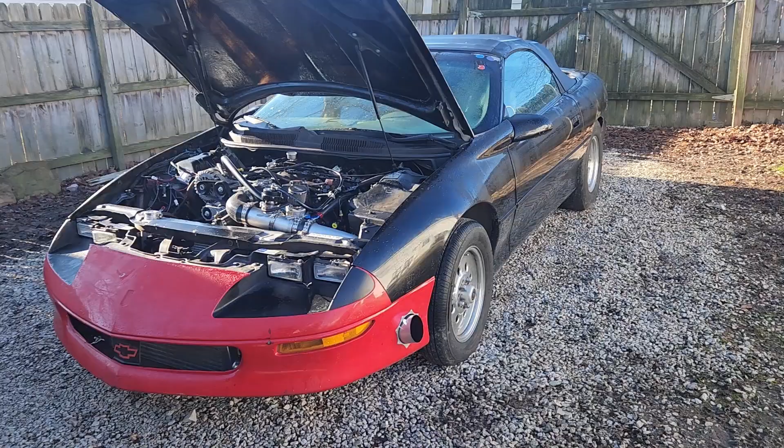But yeah. So the first step is we're going to get it up to temperature and see where the IAC steps are at. We want them between 40 and 60 at warm idle.

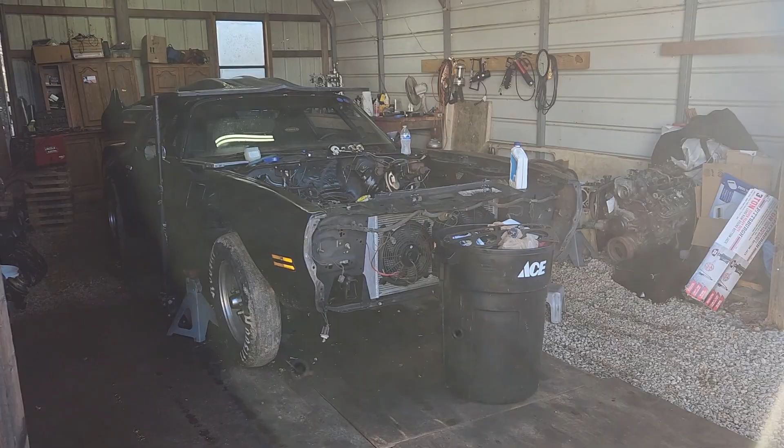Chris makes fun of me because his carbureted car, it starts way easier. That thing starts right up no matter what. At E85, it don't care how cold it is outside. It starts right up. Well, not now, motor's out of it.

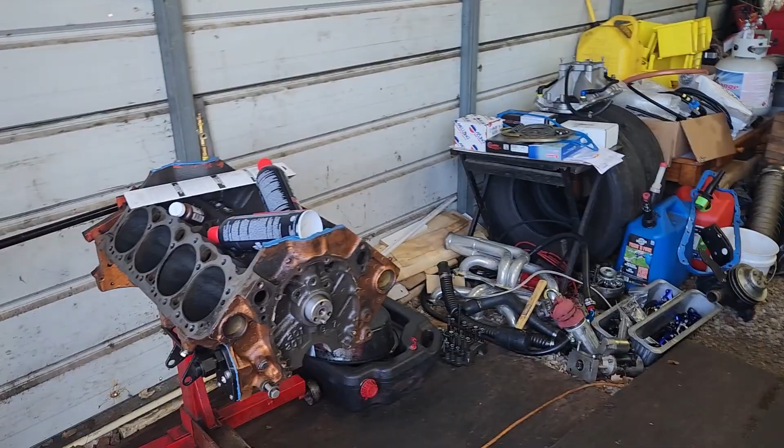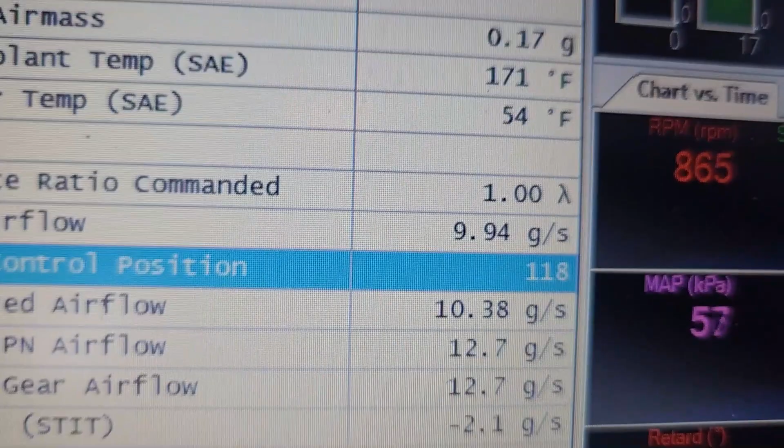All right, again, 160 thermostat. It's about as high as this thing gets. And look, we're at an idle air control position way too high. We should be 40 to 60.

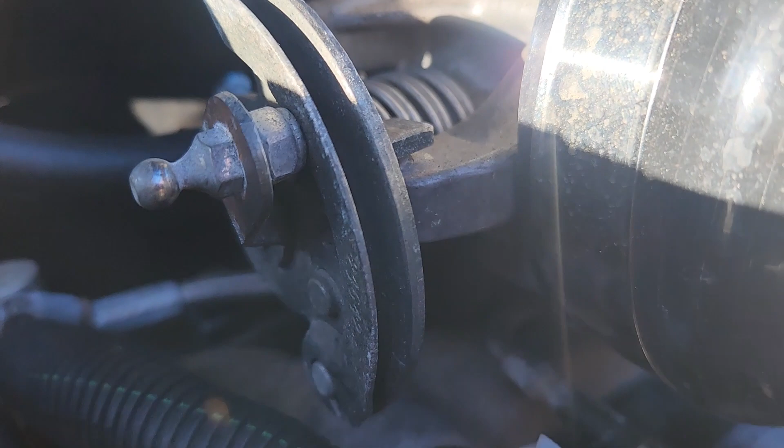What we're gonna do is, this is a T15. You have to screw it from the bottom. It's hard to get in there. So we're gonna screw that up, which is gonna open the blades up. And then we're going to reset the throttle position sensor. And then we've got to make sure that the throttle position sensor is reading less than 0.6 volts, I believe. But let's try to screw that in some.

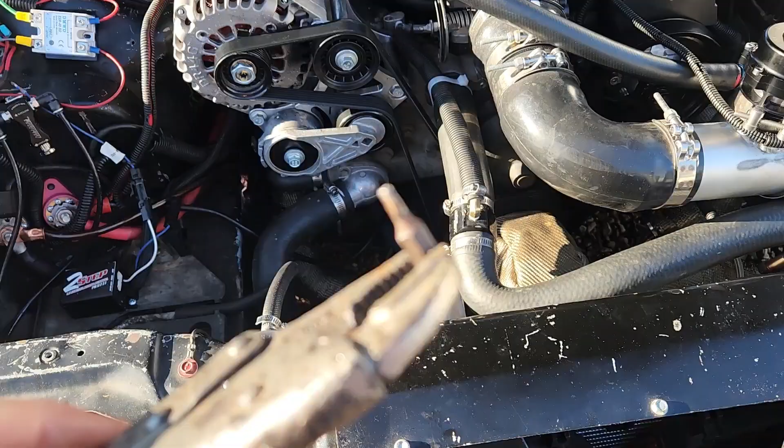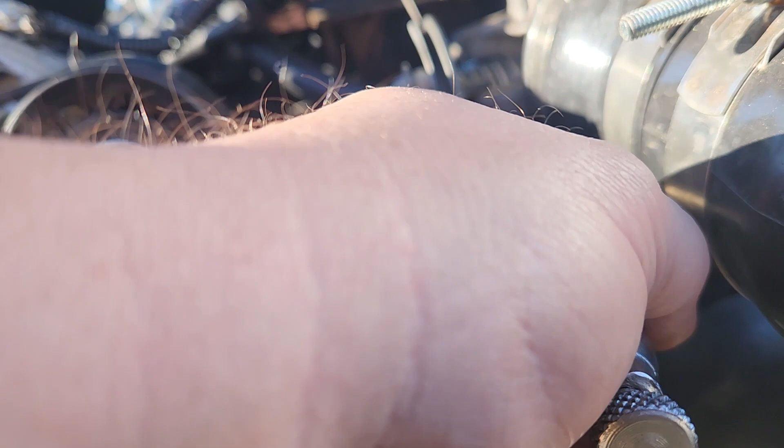All right, I got a T15 1.5 Torx bit. I just put it on a pair of vice grips. And I'll probably have to flip the throttle up and get in here and try to turn it. What a lot of people do is they'll take this out, and as long as the size of the head of the bolt is smaller than this gap, you can put it in the top, and then that way you can just screw it from the top. That's what a lot of people do, and we might end up doing that. We'll see how good we can get to it.

Well, it wasn't easy, but as you can see, it's a little bit higher now. So I just pulled the throttle back, stuck this in there, turned it. Then I had to reclock this on the vice grips because I couldn't turn it far enough to get another bite coming back. I think I turned it about 4 of these. Let's see where that's at. Let's go ahead and reset it first though.

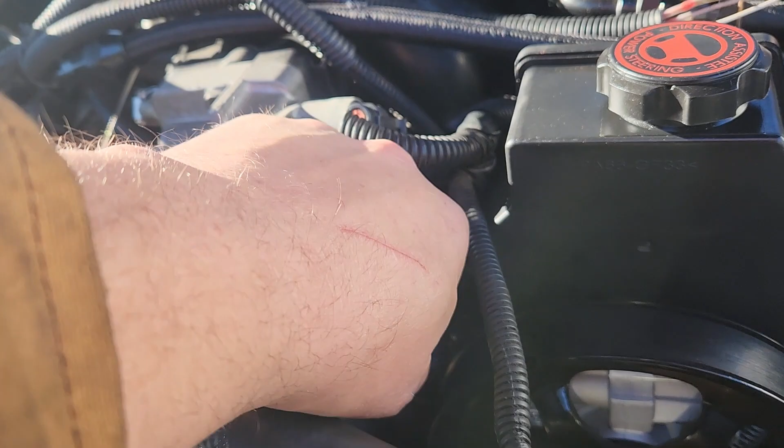So we'll unplug the throttle position sensor. Right there. Yeah, throttle position sensor unhooked, key on, 30 seconds. 1003, 1004, 1010, 1011, 25, 26, 27, 28, 29, 30. So that's probably more than 30 seconds, but anyway, we'll shut it back off. It can be more, just can't be less.

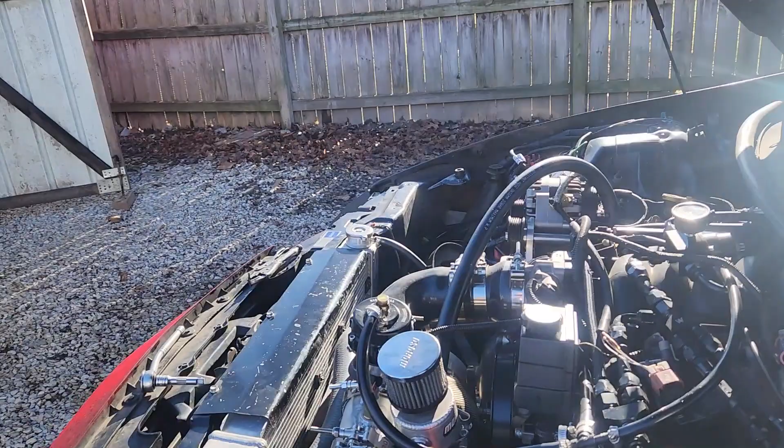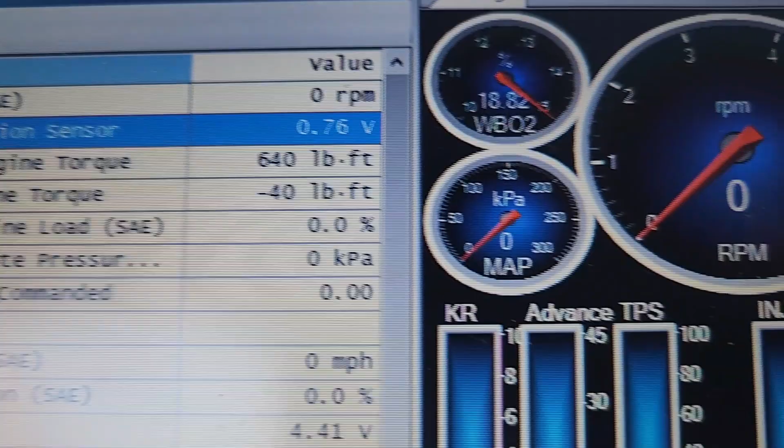Then we're going to plug this back in, and we'll check a few things on the scanner. We'll just plug that right back in there, just like that. It's plugged back in. All right, so our throttle position sensor voltage is 0.76. I mean, it reads 0%, but I'm told that's too high. But anyway, let's see where it puts the IAC steps at.

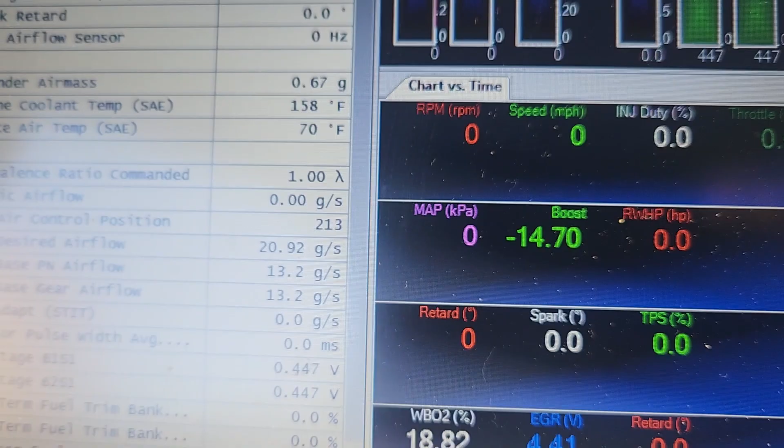See, that's all it took. We're in the 40s to 60s. That's exactly where it should be. But this is too high. We're going to have to clock our throttle position sensor some.

And also the 40 to 60 number is if you have a cam. The stock number is usually, I think, 60 to 80 at warm idle for the IAC counts. But this does have a cam in it, so we need to be in the 40 to 60 range. And every time you add a cam, you have to do this.

We need to do this on Christopher's car too, his LS1 2000 WS6. But yeah, we need to lower the throttle position sensor voltage now. So let's see if we can loosen the bolts on it and clock it a little bit to get that lower. We just need it a little bit lower. It's 0.76, we need 0.6 or below. Try to lower that voltage.

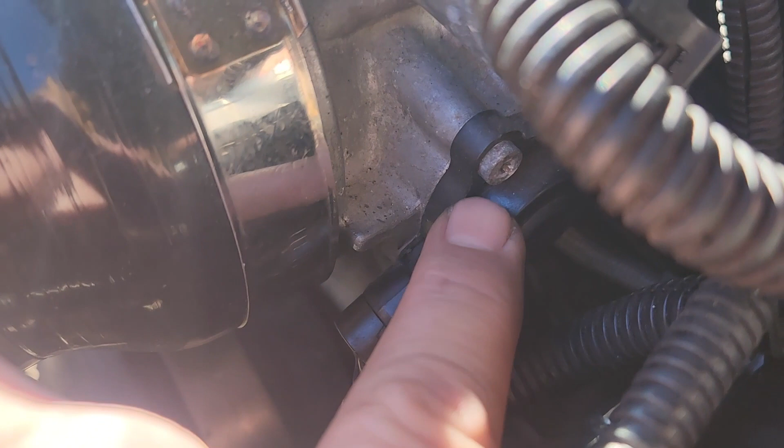What we're going to do is there's a Torx here. There's one on the other side too. We're going to try to loosen those and then turn this clockwise, the same direction the throttle would turn, to try to lower it. So I'm going to loosen those, pull up on this real high, and tighten them back up.

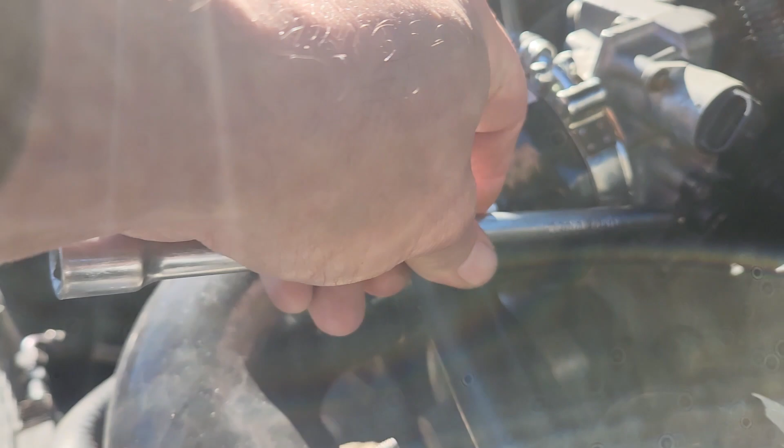Alright, loosen that bolt up. There's one down there. Now I'm going to take this extension, put it right there, tap on the back of it with a hammer, try to get it to turn some. I think it turned some, I'm not sure. Let's see where it's at. I didn't tighten it up. We're not going to start it, but I did plug it back in. Well, it moved, but not much.

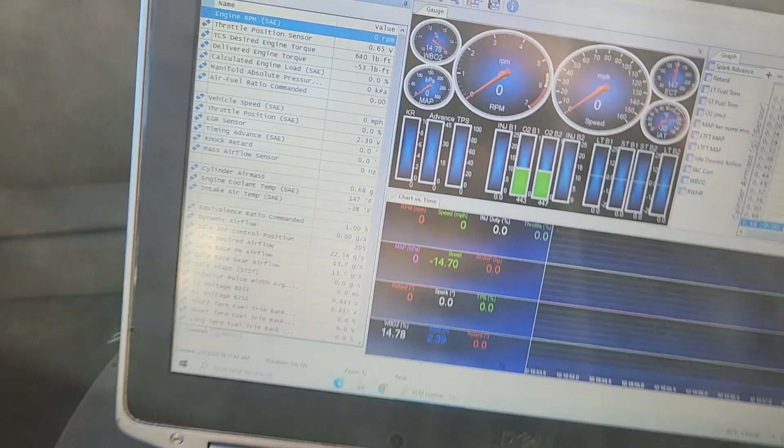Well, it moved quite a bit that time. Let's see what we got now. I tapped on it a little bit more. I saw it move that time. Let's plug this back in and see what we got. Make sure when you unplug these and plug them back in that your ignition is off. Alright, 0.65, just a little bit more. Alright, there we go. 0.57.

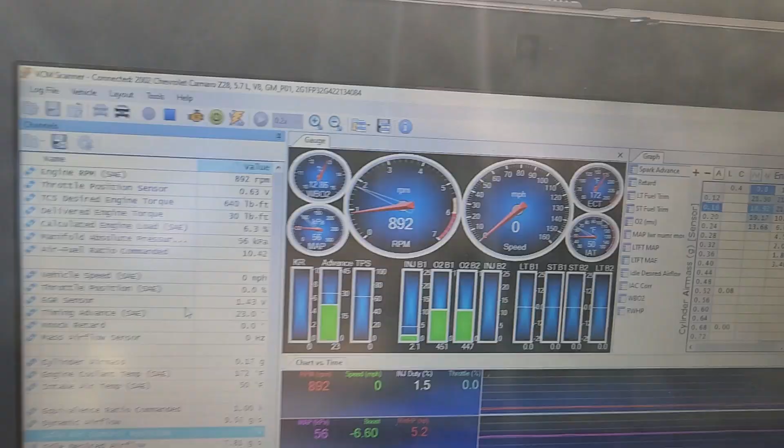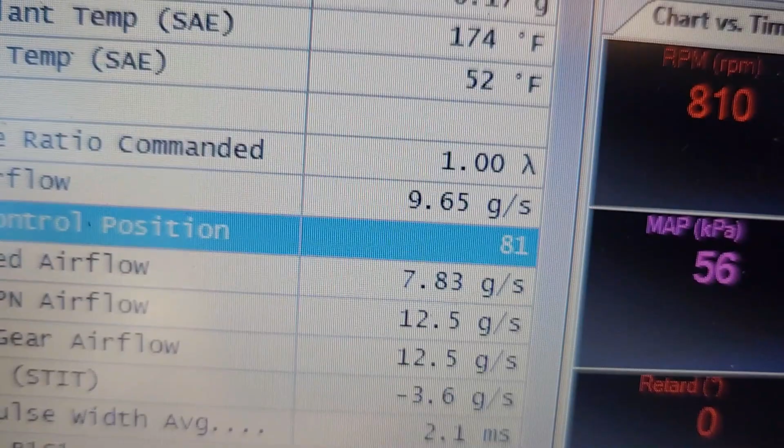Now hopefully when we tighten it up it'll stay there. See, it moved a little when we tightened it up. So we're probably going to have to take it out and elongate the holes, but let's double check our counts down here. You want to check these counts with the motor all the way warmed up. It's about as warm as this one gets. And we're still a little high, and our volts are still a little high, 0.63.

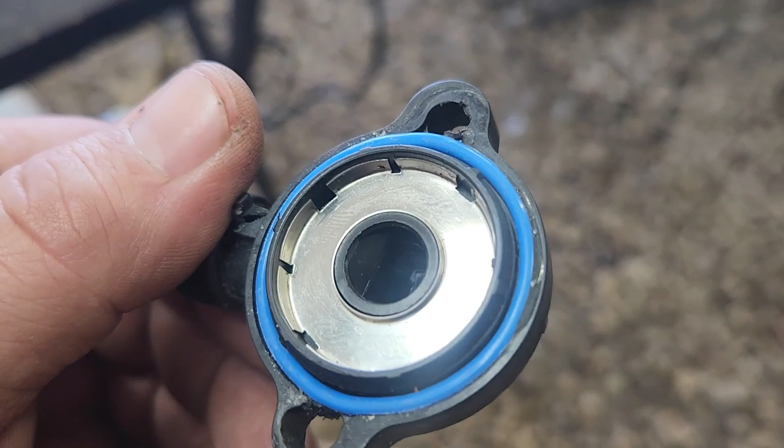So we're going to have to take that throttle position sensor off, elongate the holes, and screw the throttle body out just a little bit more. Alright, I took the throttle position sensor off. That's what it looks like. There's like a little groove it catches on right there. But we needed it to turn with the throttle body to reduce the voltage. So we're going to have to hollow this out on this side and this one on this side so we can turn it that way.

Just using a drill with a drill bit, I'll put it in there and go back and forth and hollow that out. There ain't a lot of meat left there, but a little goes a long way on them voltages, as you saw when we twisted it. There we go. Elongated the holes. That should be plenty. That didn't take 5 minutes with the drill and the drill bit. I found a drill bit that would just fit in the hole.

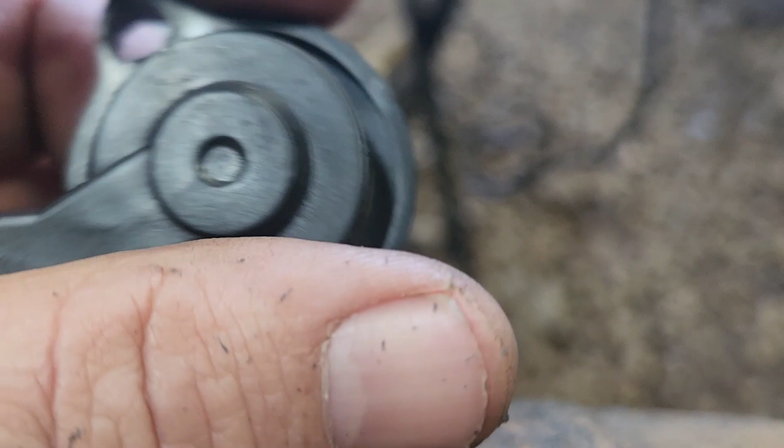Just went back and forth and pushed it that way and on this one, so that'll let it clock this way with the throttle body, how the throttle body opens, which will lower the volts. And I think we're shooting for 0.4 to 0.6, but as long as we're under 0.6.

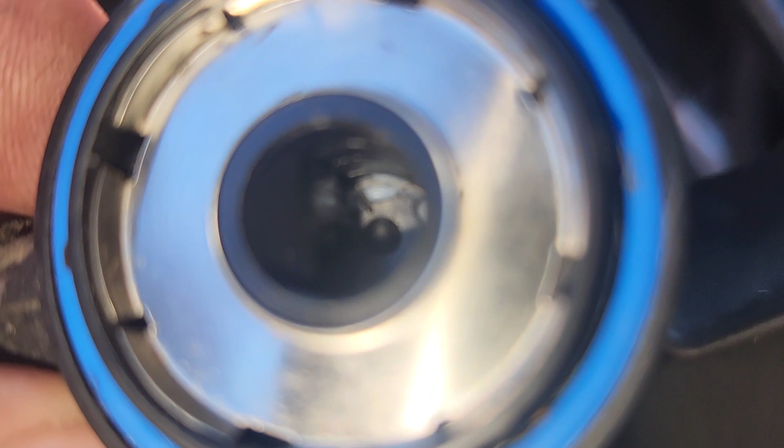You put this back in there, see how that's a flat side? That flat side has to go up against that flat side. You'll know if you don't got it right. Oh, yep. Just slide it on, flat side, flat side. At warm idle, which this one idles at 170, 180, we were still 70 to 80 IAC steps, so we're going to tighten this up a little bit more.

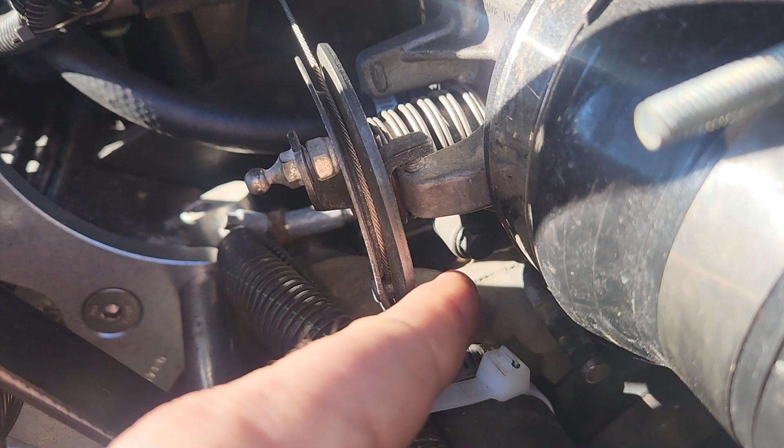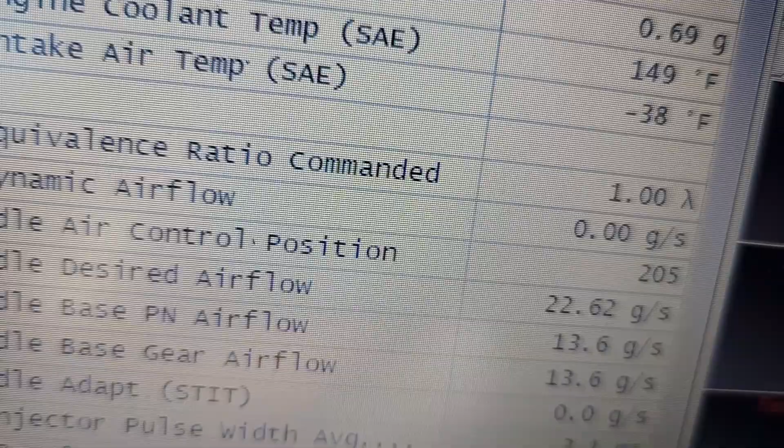But look how far that moved. Moved a lot that time. That might be too much, we'll see. Alright, there we go. It ain't easy getting in there, but it did about 3 more of these. You can see there is more space there. Alright, ignition on, car not started. We're at 0.53. Perfect. Now let's tighten the throttle position sensor up, plug everything up, and see where our idle air control counts are. Alright, throttle position sensor is back tight.

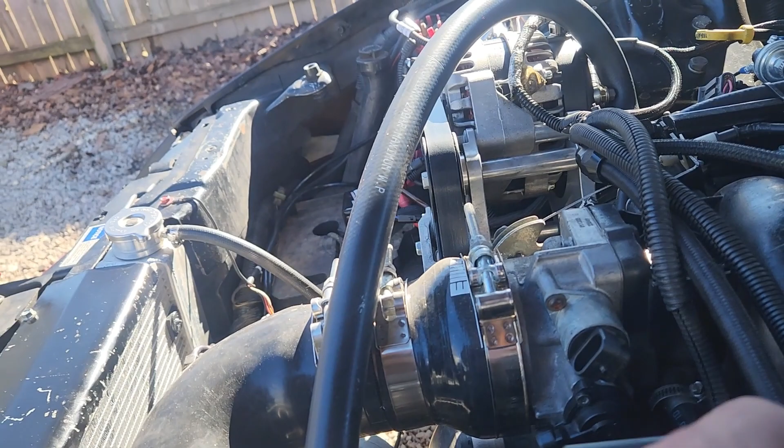We'll go ahead and do another throttle position sensor relearn. Ignition on. Do not start the car. 30 seconds. 6, 7, 8. 15. 20. 25. And 30. Turn the ignition back off. And plug everything back up. So I unplugged everything. You only have to unplug the throttle position sensor. I unplugged everything because it's hard to get in there.

Now, let's see where we're at. Alright, ignition back on. Start scanning. I tightened it back up. Look at that, 0.59. Now let's see what our counts are, but see, it already cooled back down. And I always forget to turn the pump back on. The pump comes on with the keys, so when I'm cycling the key off and on, I usually turn the pump off.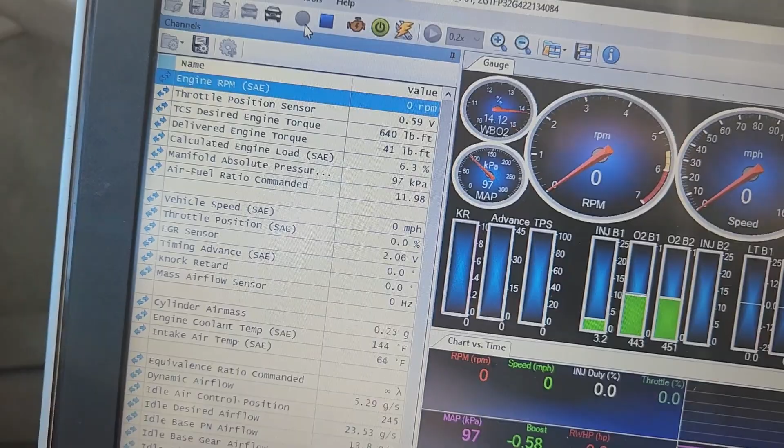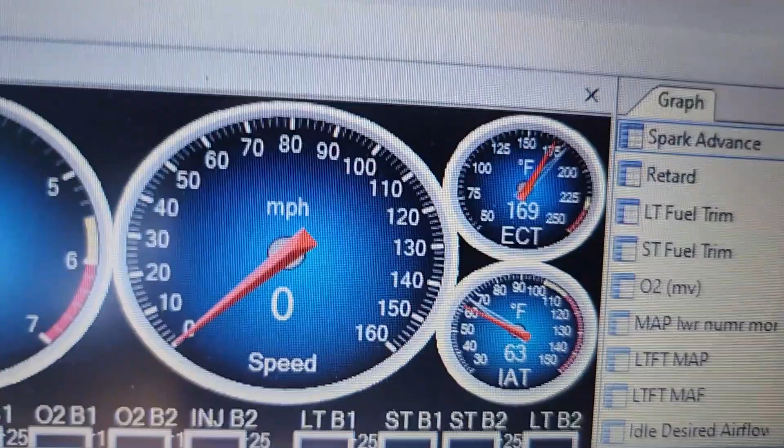Now, we'll see when it warms up. See what this idle air control position is after it warms back up. It's so cold out here, it don't want to get up to the temp it usually runs at. So I manually went in here and shut the fans off so I can get the temps up. But you can already see it's going to drop below 60.

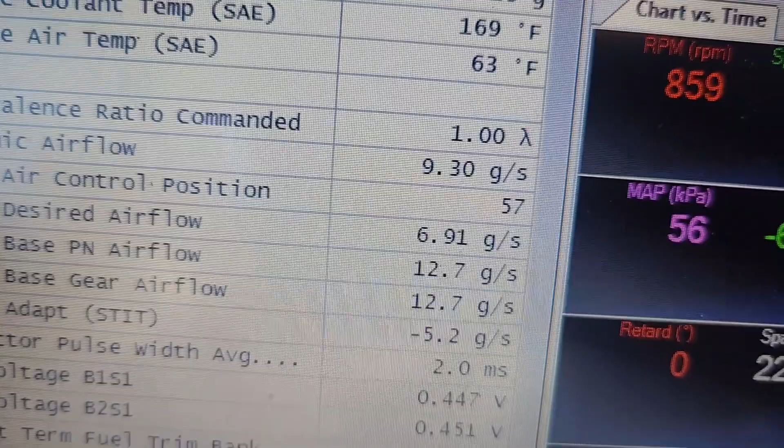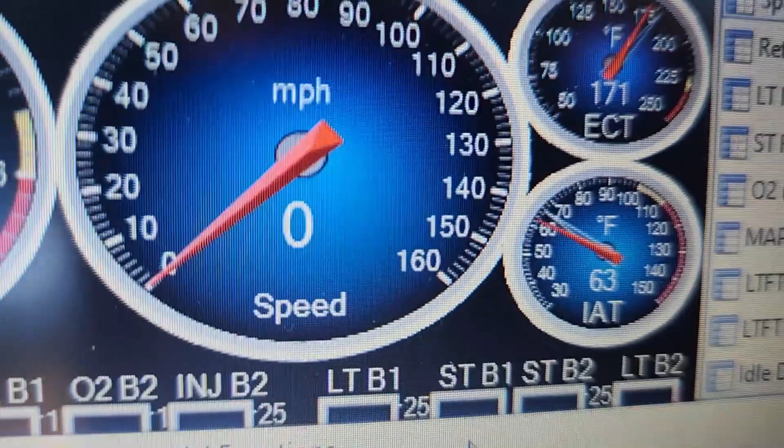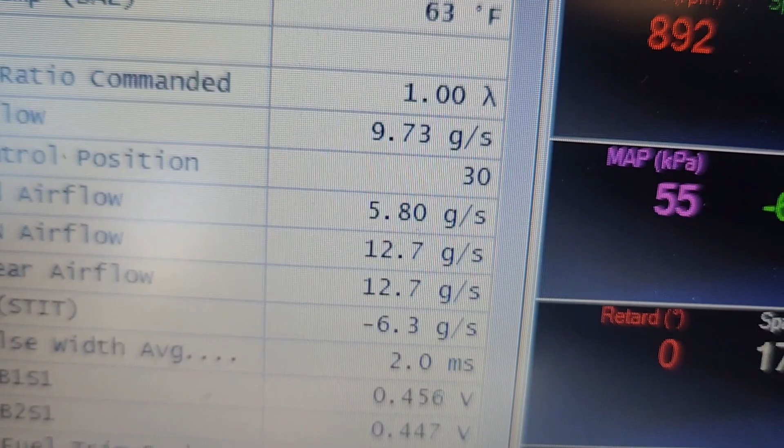Yeah, it's idle air control position counts. Yeah, we're already at 57, 55. That's good. And now we're at 171. The fans kick on at 170, so where it's so cold. Yeah, but look, idle air control position 42. Look, we might need to go down some. Let's go ahead and turn the fans back on.

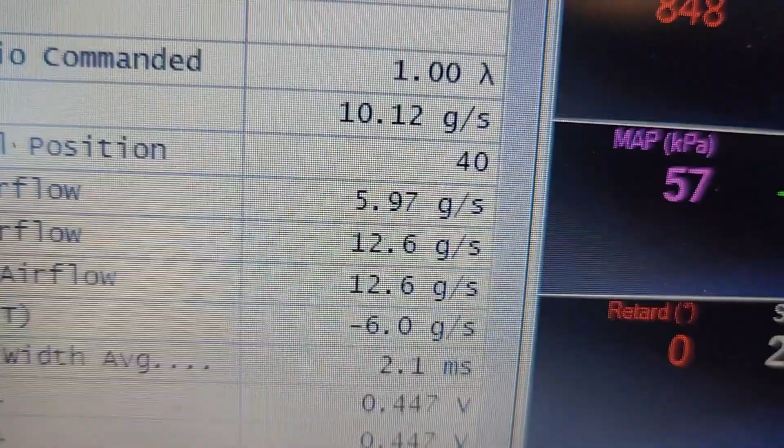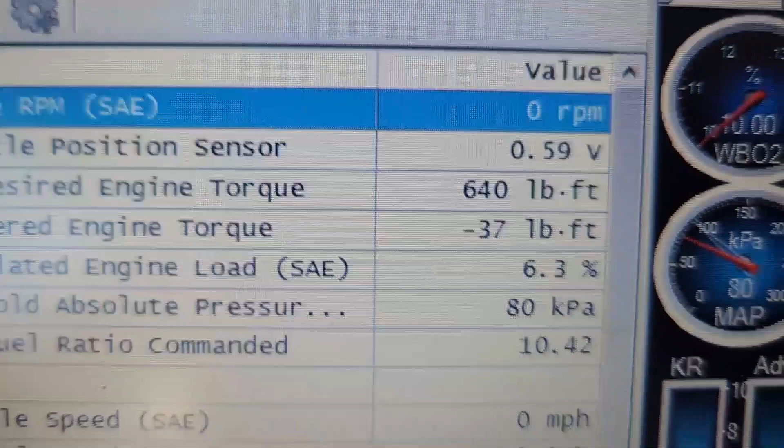Alright, we went a little too far. Well, no, idle air control position. Yeah, we went a little too far. We're gonna close the blades back just a little bit more. Probably just one little quarter turn like I was doing. Should do it. And look at our volts. Now, when we close that down, it'll lower the volts some. So that should get us perfect.

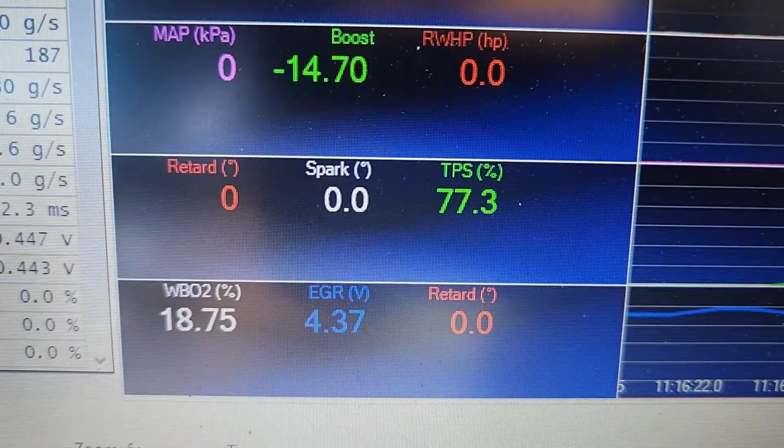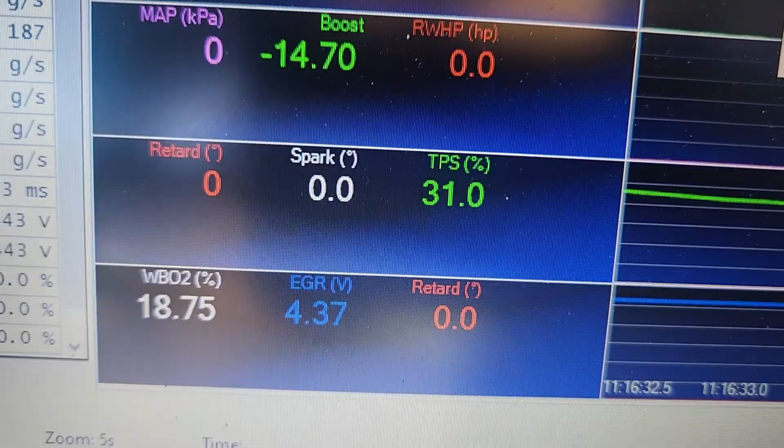But let's shut the car off and turn the key back on. And let's mash the gas and make sure we go to 100% on the throttle here. Nice and smooth. All the way to the floor, nice and smooth back out. Make sure it don't jump around. And floor it. And let off. And floor it. And let off.

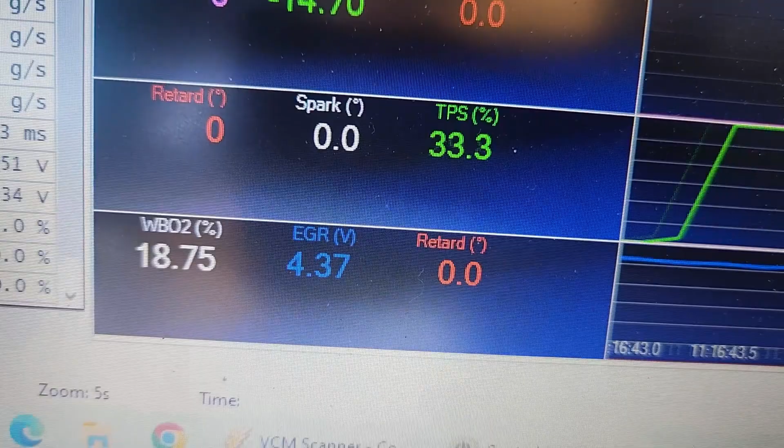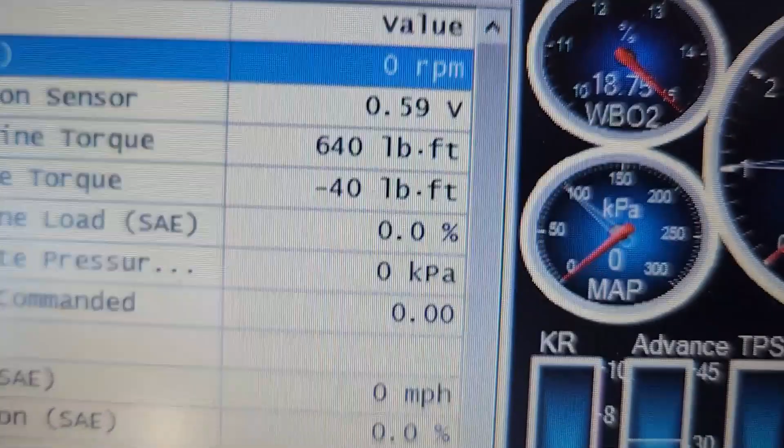Everything looks good. We'll close the blades back down. That'll lower that number a little bit more. If you notice, it was jumping around from 0.59, 0.61. We need to raise this idle air control position just a little bit more. To add these in this channel here, you just use that little gear button right there, right beside that floppy disk.

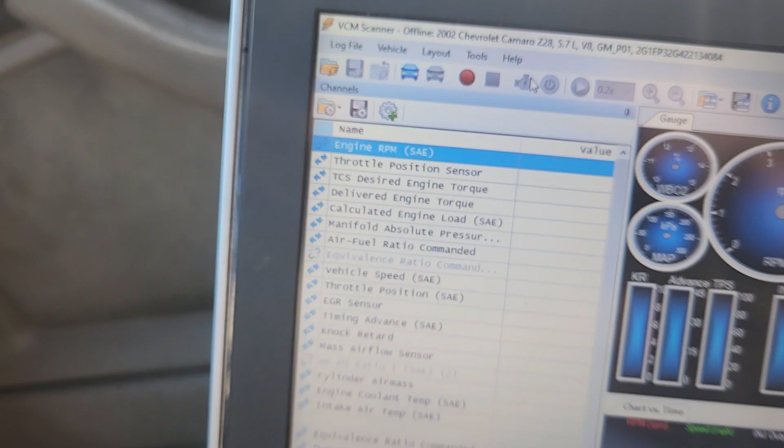But you have to have the scanner stop scanning and disconnect from the vehicle, and it'll light up green. But for it to light up green, you have to be connected to the car. If you're not connected to the car, it won't let you do it. But once you hook it to the car, that'll light up green, and you can click on it, and it opens this thing up. You just type in what you're looking for.

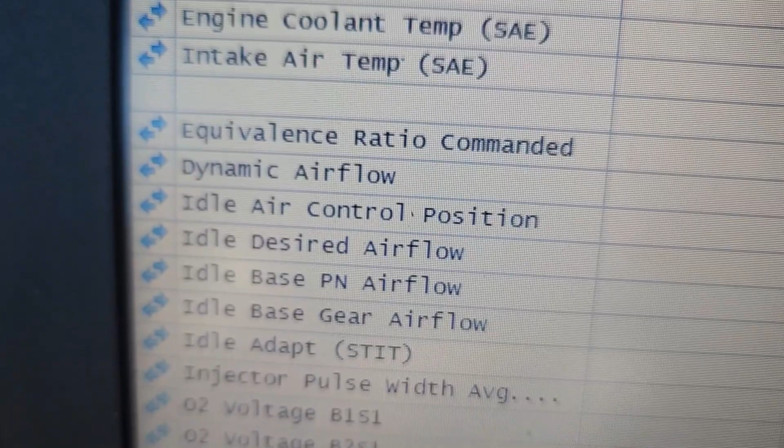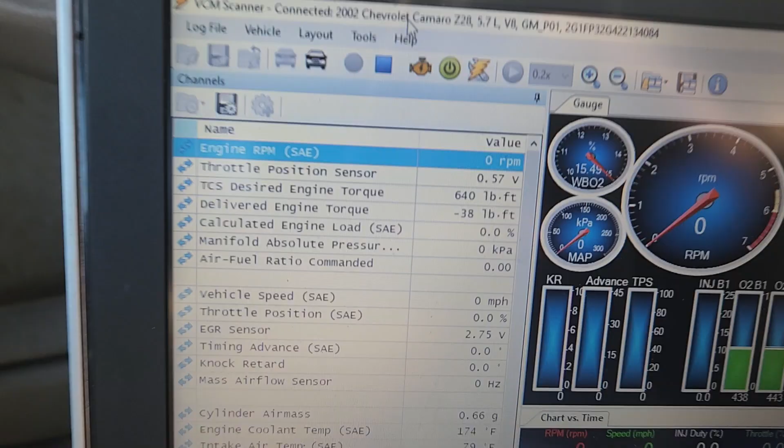Like we used a throttle position sensor, and we used the one that had the V next to it for volts, and then idle air control position. You'll need those in this channel to be able to see what we're seeing. And this is just HP Tuners, but let's close it down a little bit more and see if that helps any. We're a little bit too high on both, and I think if we lower it, it'll put them both exactly where we want it. All right, we lowered it down some. We're at 0.57 now.

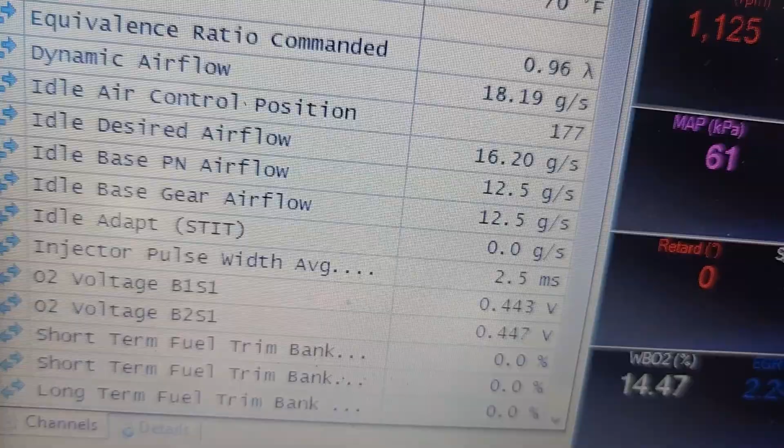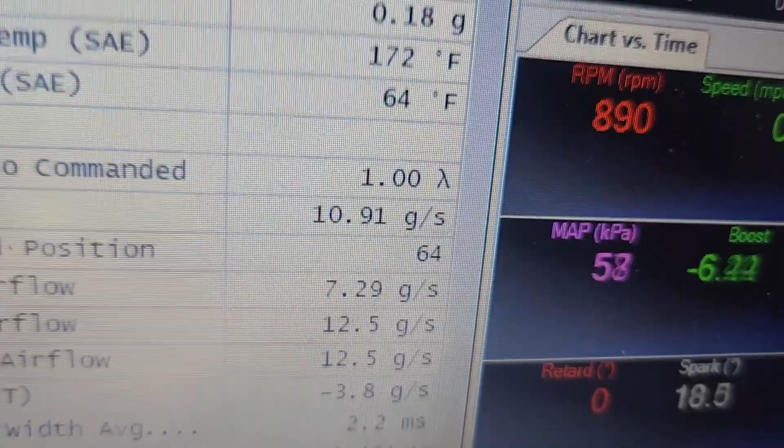Idle's got to set in. There it goes. That's going to do it, guys. That's going to do it. So anytime you move that throttle position and the throttle position sensor, go ahead and reset everything. Make sure, I believe it's 0.4 to 0.6 volts is what you're shooting at on the throttle position sensor. And with a cam, the idle air control counts

need to be 40 to 60 with a cam, and then a stock cam is supposed to be 60 to 80. But the relearn procedure on the throttle position sensor, start over: unplug the throttle position sensor. Turn the key on. Don't start the car. 30 seconds. After 30 seconds, turn the key off, and then plug the throttle position sensor back in. But anytime you move that stuff, do the relearn procedure.

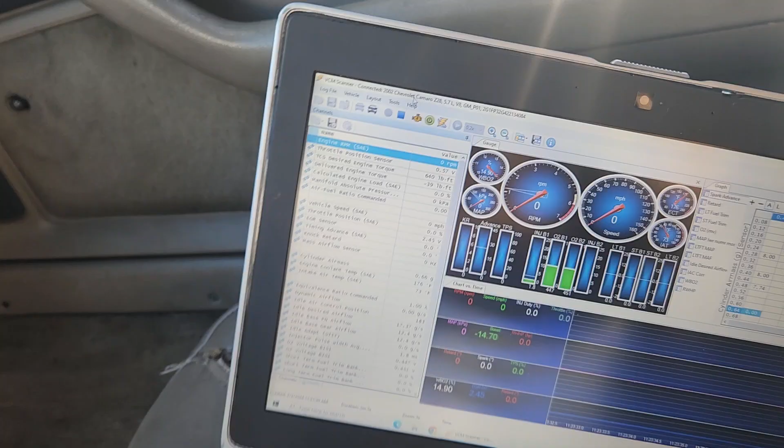And then again, with a cam, the idle air control counts should be 40 to 60, stock 60 to 80. And then the throttle position sensor voltage, I believe, is supposed to be 0.4 to 0.6. But once you get everything done, you want to make sure that it goes from 0 to 100%. Nice and smooth, too. And then below 0.6, 0.4 to 0.6.